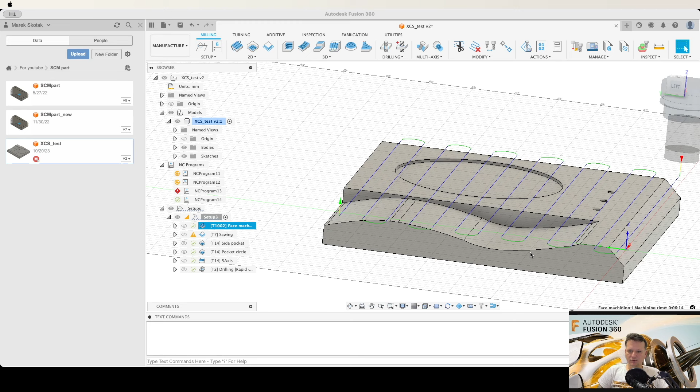So let's go, and I will show you how it works with Fusion. We can start with this simple model, on which I can show you all operations necessary for using this postprocessor. So let's go.

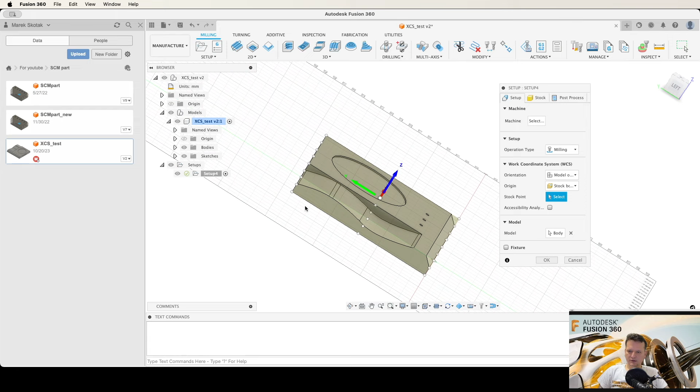There we have a setup, but we will delete it. Also this one we can delete. And we will start with a new setup. So new setup, and set the 0 point. It can be in this point for our output to the Maestro.

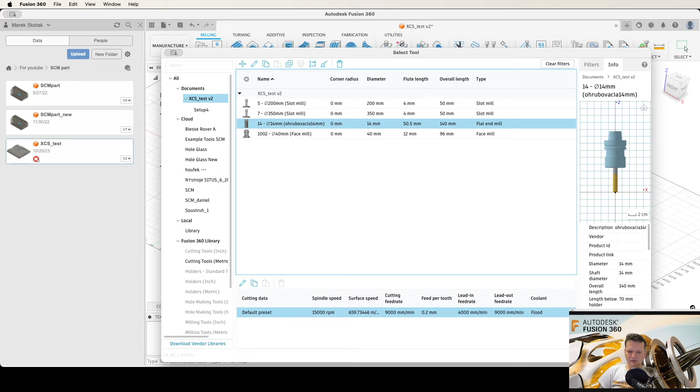Now we can use some 2D pocket operation, for example, and we will select this one and select this pocket, and voila, we have a new operation.

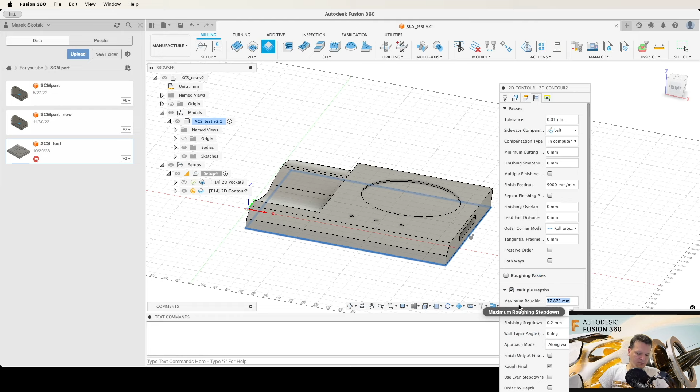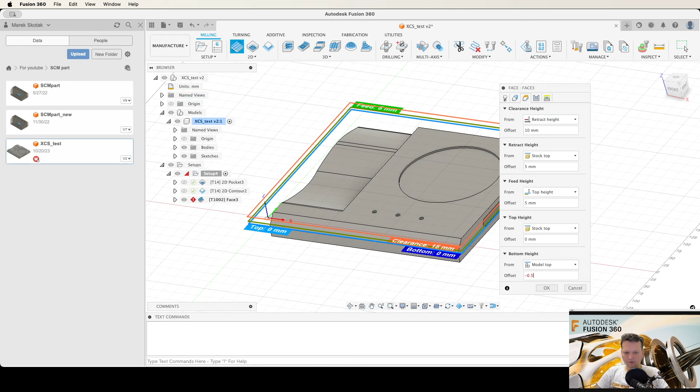Second can be 2D contour, which will be this, and we can set multiple depths, which will be 10 millimeters, and we will have more steps in the Z-axis. We forgot one thing, it's face machining, because I have a tool there for this, which is this, and it's okay, and it will be minus 0.5, for example, and this we will put on the top. I will only edit this tool because in my Maestro it's E002.

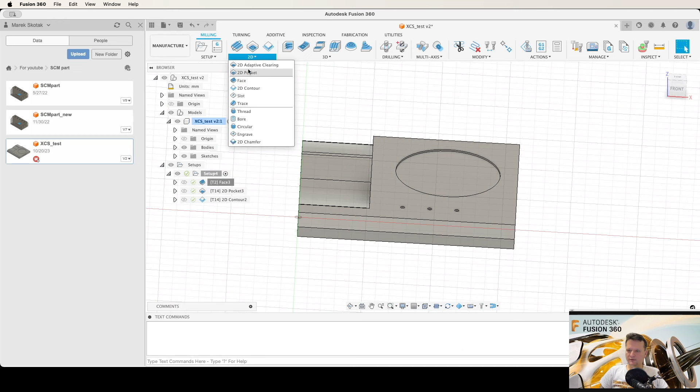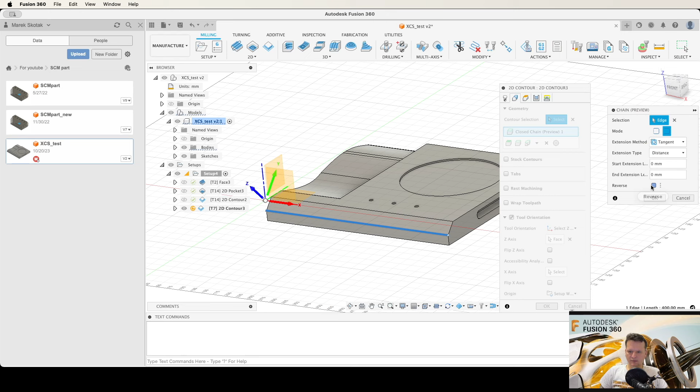Okay, it's recalculated, and as the last operation will be saw cutting. So we will use this tool for it. First we set tool orientation. Yeah, we set correctly, and set the line which we will use for our cutting. So edge, open, and we will reverse it. We can also set the extension. This is the newest menu in Fusion, so it will be 100.

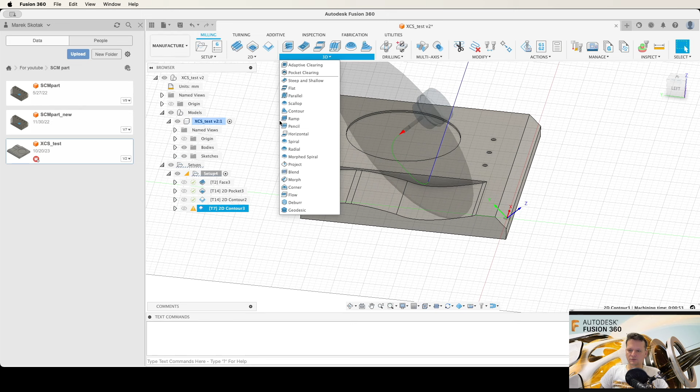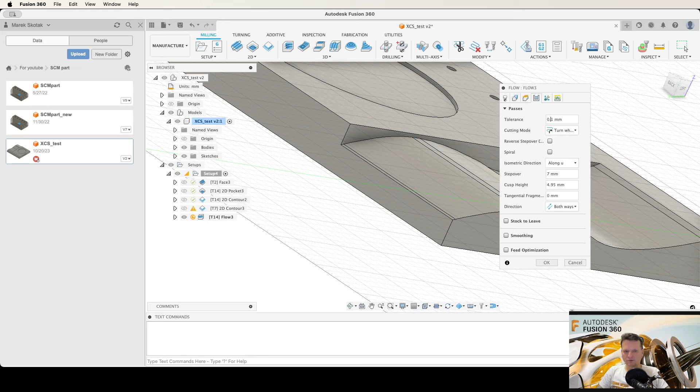Okay, and we have this operation as well. The last step will be this 5-axis operation. For this, of course, the machining extension in Fusion is necessary. So we will use the flow function, and again we will set this tool and select these faces, this and this. 0.1 and step over 7 millimeters. Okay, can be. We will set it but another direction, so it will be along V. Yeah, it looks better.

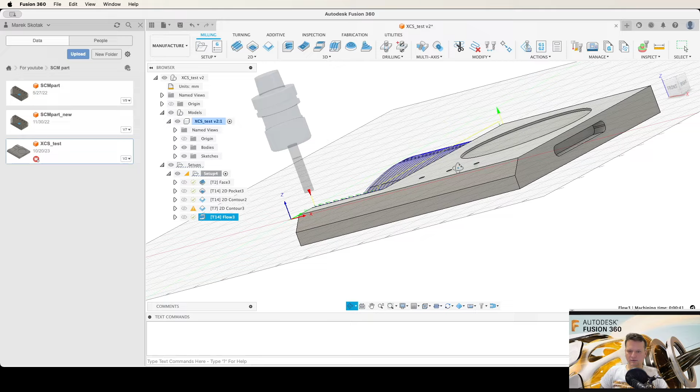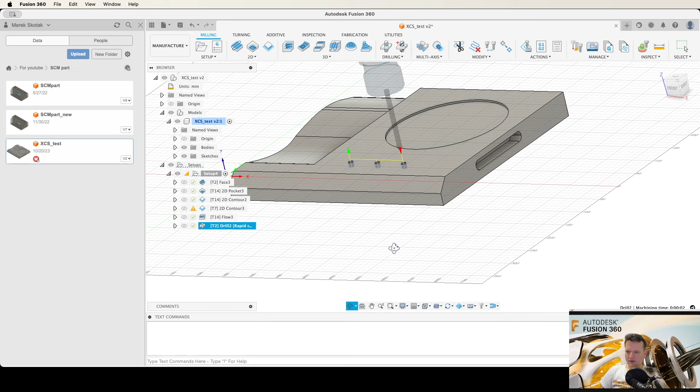And as the last step will be drilling these holes. So we will set the drilling operation and set this drill, and by select same diameter we will select all holes which have the same diameter, so okay. And we have almost all, only what I missed is this pocket. So pocket, okay, this can be the same tool.

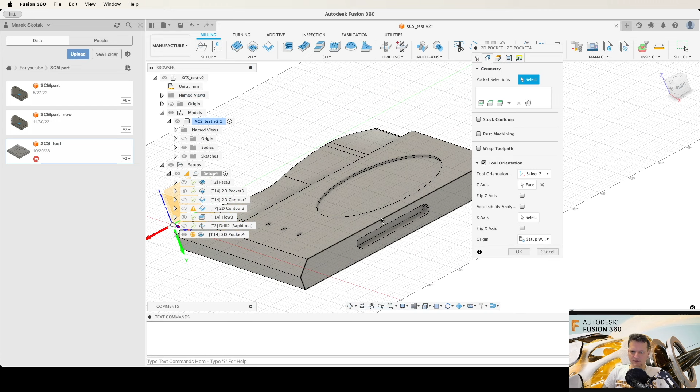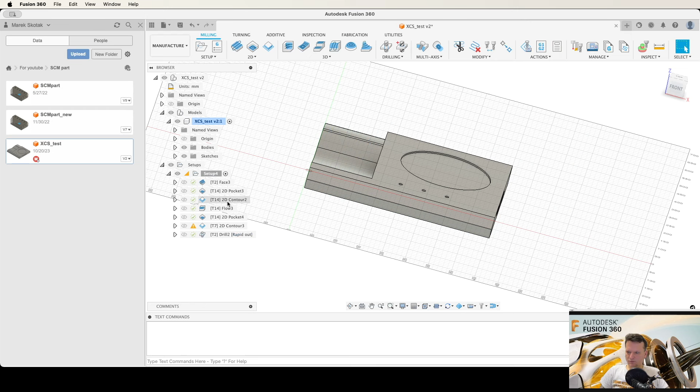Again, tool orientation, which must be set on this face, and select this. Yeah, now it's correct. I will make also the operation ordering, because it will be better this way, and this way, and maybe this one there. Okay, so we have it.

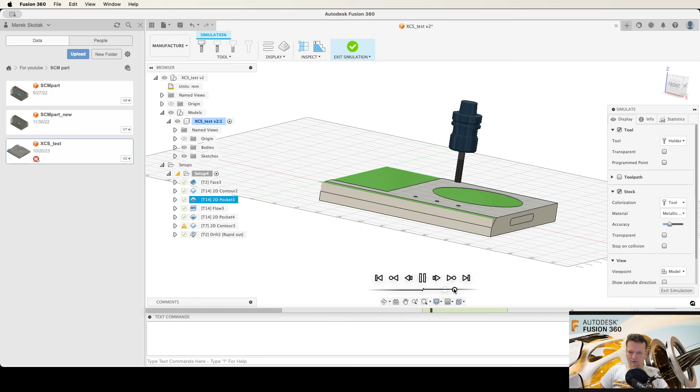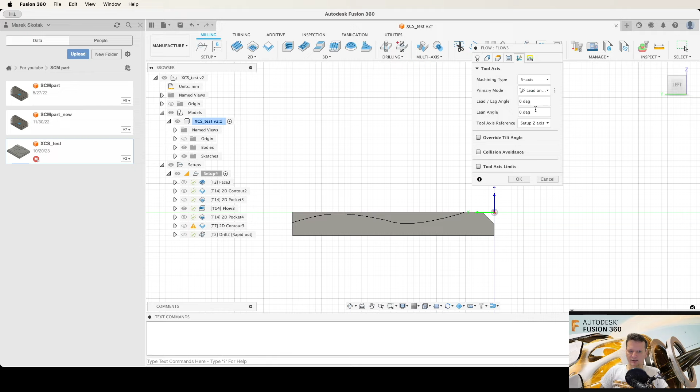We can simulate it in the simulation there. So with the stock, it's face machining, contour, pocket, 5-axis. Yeah, we have it. Only we will check if the flow is set as a 5-axis operation. I think I forgot this, so by multi-axis we will set the 5-axis and lead and lean. Yeah, now we can set that correctly. So if we simulate only this operation by some slower feed, oh, this, yeah, looks good.

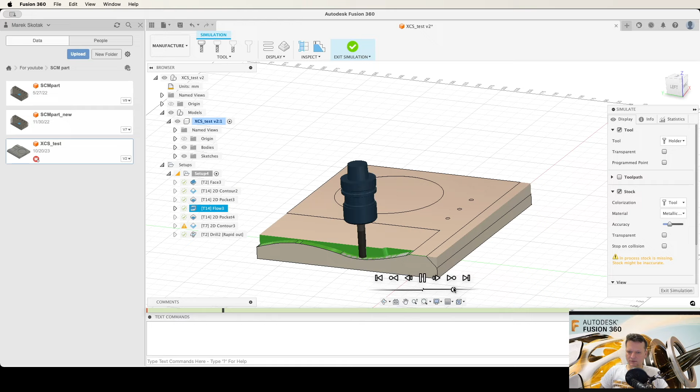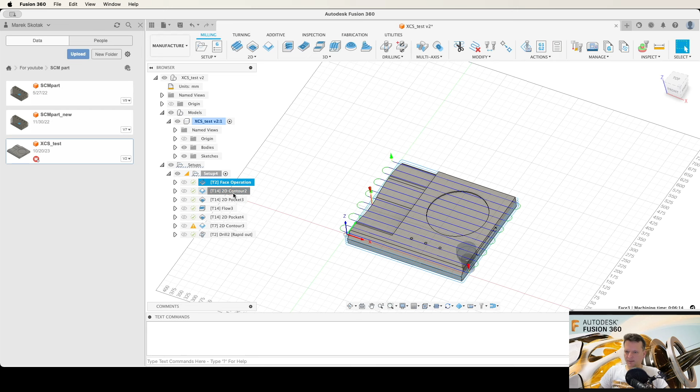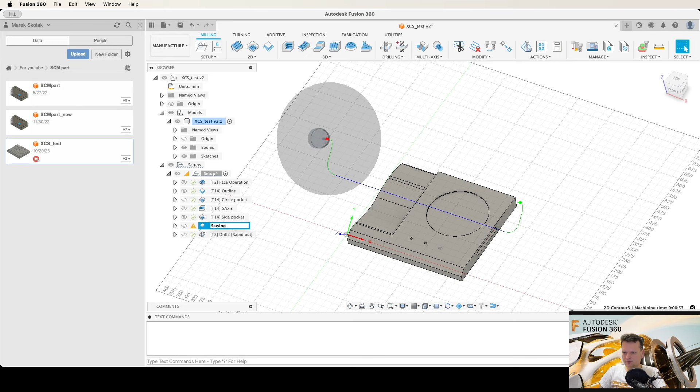Now we can go to post process and output the file as an XCS file. We can also check that if we set this operation name like face operation, it will be outline, circle, pocket, it's 5-axis, side, pocket, sawing, and drilling. And our setup we can rename as SCM XCS file.

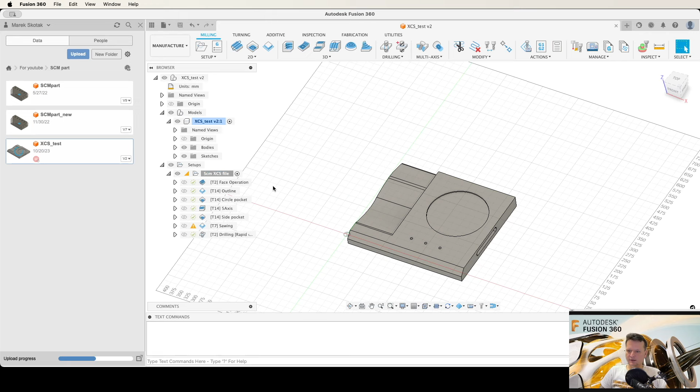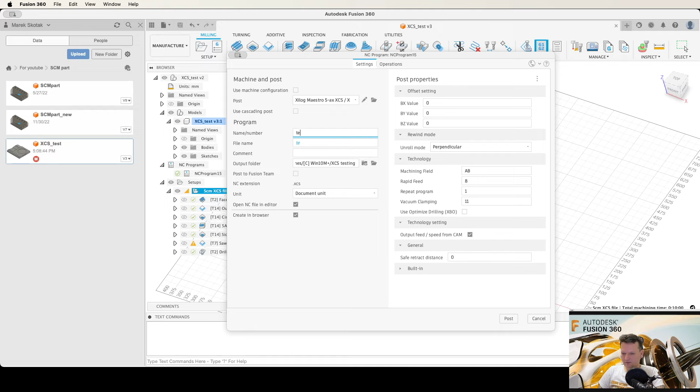Save it, and now we can go to post process and check the file if it's correct in Maestro. So go to post process, select the Maestro 5-axis postprocessor. We can also set the values which are there, like field, rapid feed, vacuum clamps, and other sections. There is also an option for output feed speed from CAM, so you can decide which setting you want, if your feed and speed will be from the machine, from the Xilog, or from Fusion. So we can leave it as from Fusion. So test XCS file, and we will post it. Yep, it posted correctly.

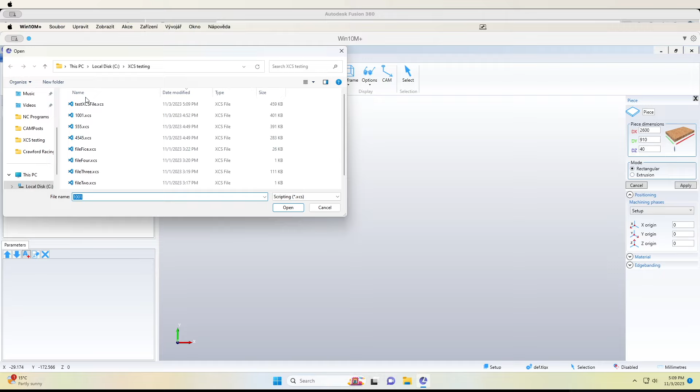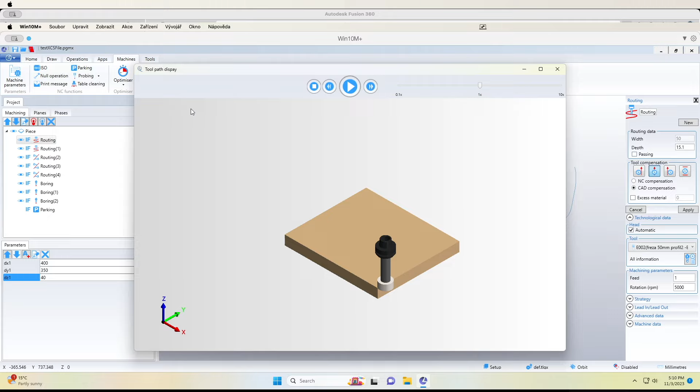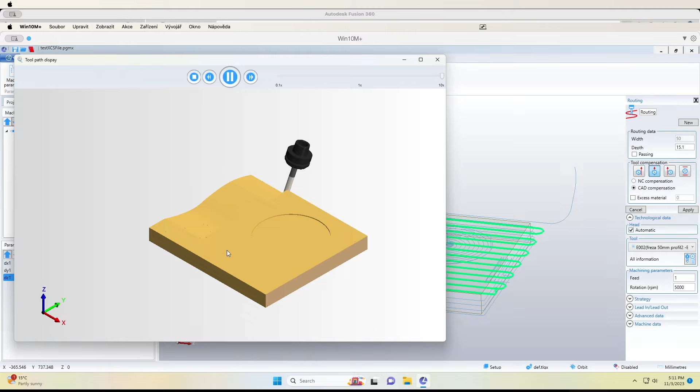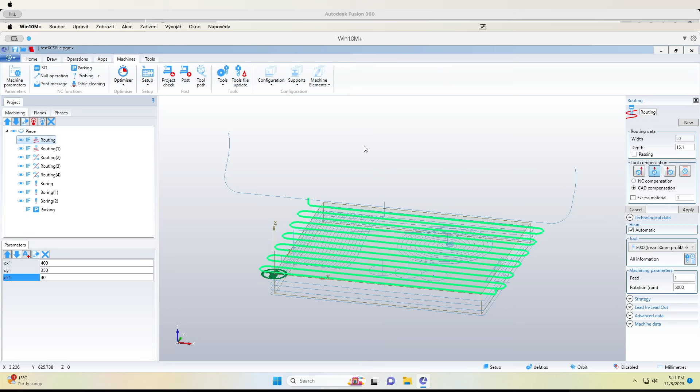And we can switch to Xilog Maestro, which I have on another screen, and there we set the home, import script, and test XCS file. If we open it, yep, we have a file, and there we can set that we have all operations, also with this, so we can save it like this and simulate it in Maestro as well. So this is the face operation, there is outline and pocket. Yeah, there we have our flow function, which is 5-axis, not exactly, it's 4-axis. The side pocket, our sawcutting, and as the last should be the drilling operation, if I remember. Yeah. There I have an incorrect tool, but okay.